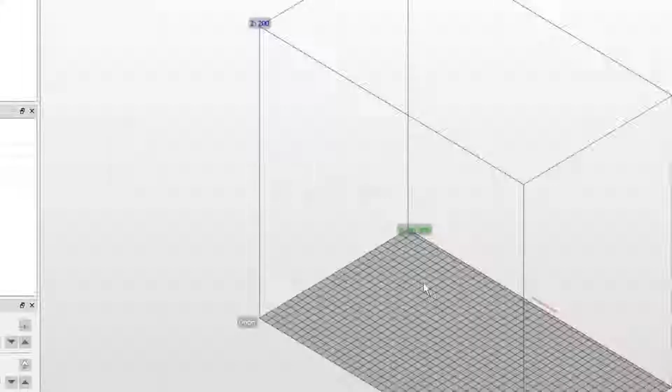The next step is to import the STL files to use. Click the Add Parts icon in the top left corner of the builder. Hit Select Files and choose the objects to print. Select Open, and then Open again. Now the nose can be seen on the build plate.

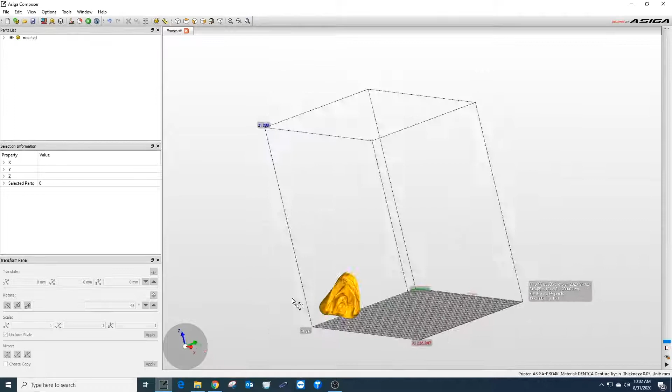Placing supports onto this build structure will be more technically sensitive than other kinds of prints. First, make sure not to place supports on any part of the print that will be integrated into the patient's face. So, for a print of a nose, placing the supports on the outside of the nose is optimal.

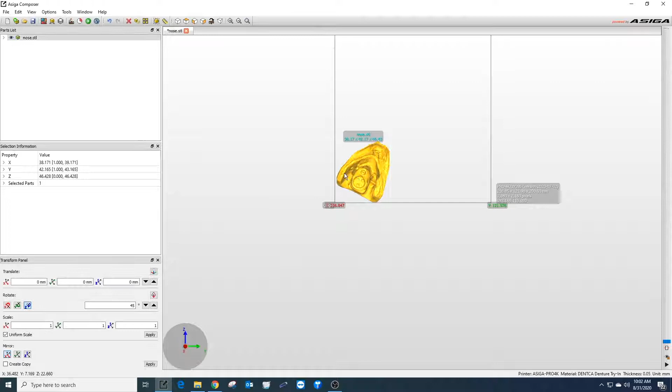If the nose is placed on the build plate at an angle, find the view that best allows the nose to be adjusted, so the outside of the nose is parallel with the print plate. Right-click on the print and hold to rotate the structure into the right position. Reminder that if the print turns purple, it means it is currently in a position off the build plate and will not print properly. Always make sure the structures are properly placed inside the build box.

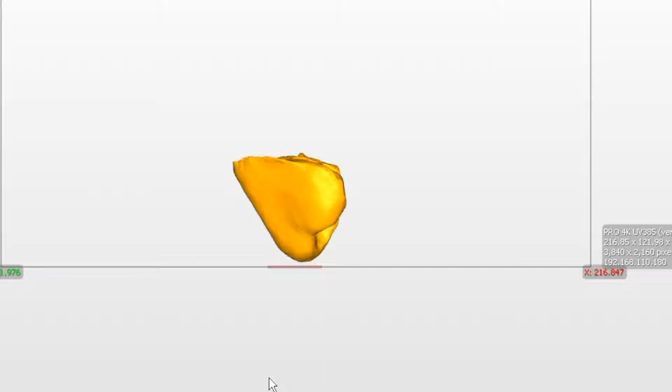The next step is to place the supports. If possible, avoid putting supports in the nasal cavity of the print. Select the Generate Supports tab in the Builder menu. First, for this print, uncheck the Model Intersupport option. This should prevent supports from being built inside the nasal cavity.

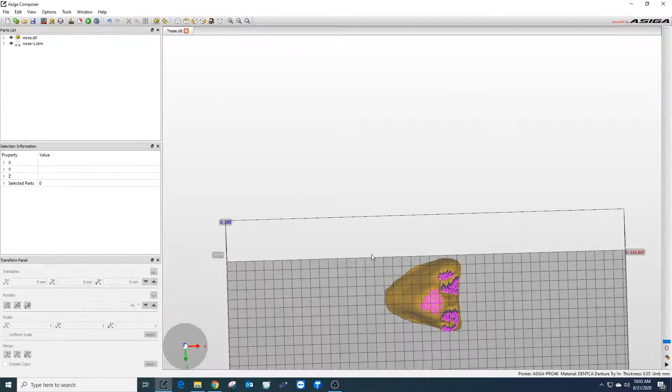Now select Apply. Once applied, the build plate can be rotated on screen to check integrity of the print job, because the supports are very small. This allows for little scarring to be left behind when removing supports from the build. Check to ensure supports are only on the outside of the nose surface. Extra supports can be added to try and ensure a clean build.

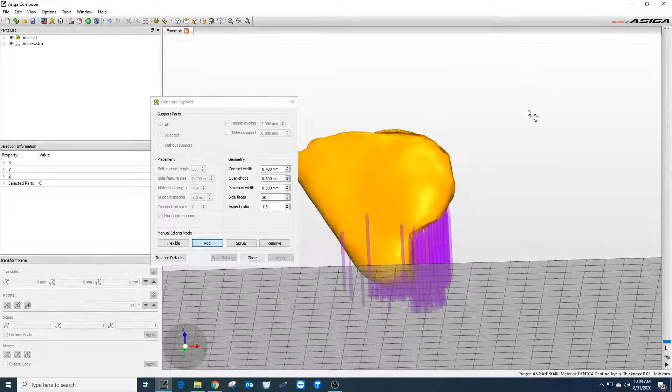Click Add under Manual Editing mode and click on the print where to add extra supports for strength and rigidity. If there's extra space on the build plate, it's a good idea to clone the print and make a backup. Right-click on the print and select Clone to add another print to the build plate.

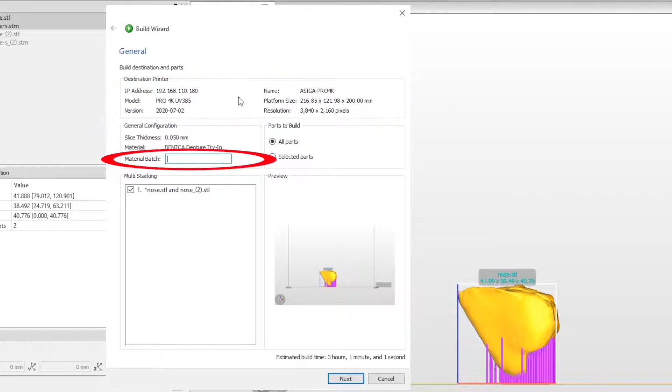Next, click the Build icon in the menu bar. The Build Wizard window will open. The first window is an outline of the print job parameters and the material being used, along with a place to add a batch number if needed.

Click Next. If this build is using the same information as a previous build, the print optimization buttons may already be selected. If not, make sure fast print mode is checked on. The build time for this print is estimated to be 1 hour, 40 minutes and 42 seconds. If fast print mode is disabled, the build time becomes 3 hours, 1 minute and 1 second.

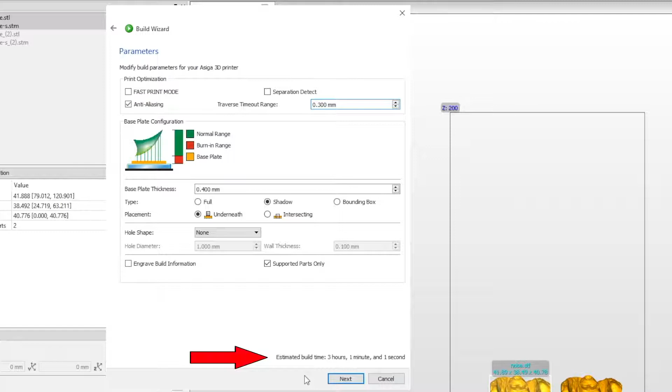Next, make sure the base plate thickness is at least 0.4 mm thick and the Supported Parts Only option is checked. Then select Next. The Advanced Parameters page will now appear, and no settings on this page can be adjusted. Click Next again to view the summary page.

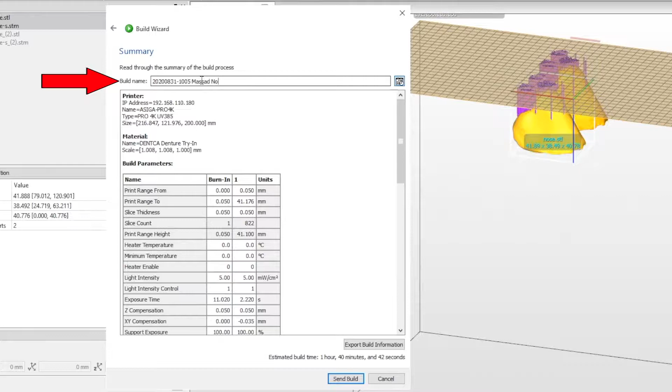Located on the summary page is a section to name the build you're about to send to the printer. After naming the print, press Send Build to send the job to the printer.

Once the build is finished being sent to the printer, select View Slices. Here you can view the layers being sent to the printer and ensure nothing is missing and no mistakes have been made in designing the prosthetic nose.